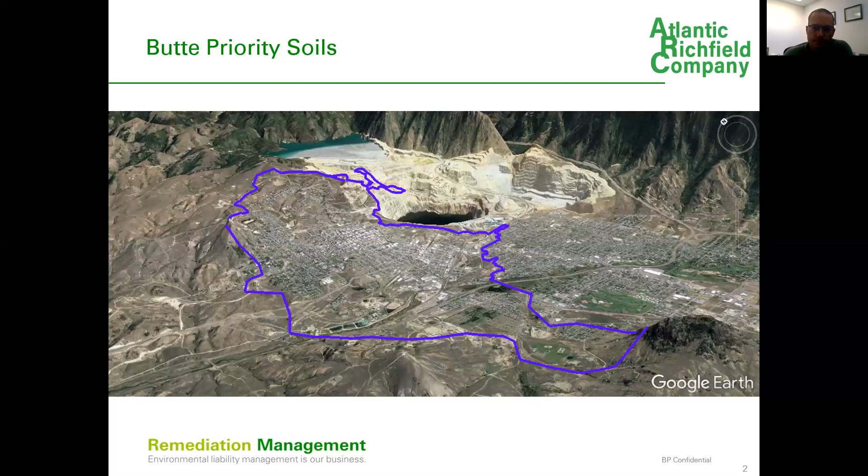In addition to some of that more prominent remediation work, we've also worked with the city to slip line several hundred feet of storm trunks, repair illicit connections. We've installed 4 hydrodynamic devices to treat stormwater at the base of the Butte Hill. We've actually constructed over 10,000 linear feet of curb and gutter in Uptown Butte. And we also completed some street maintenance and storm drain maintenance. And all that work has helped us improve surface water quality in Silver Bow Creek.

On average, we capture about 450 or so gallons per minute with the subdrain, and we pump that water to the Butte treatment lagoons, where on average we treat about 630 million gallons of impacted water each year. There is some surface water influence to that, but the majority is impacted groundwater captured by the subdrain and additional hydraulic controls near Lower Area 1.

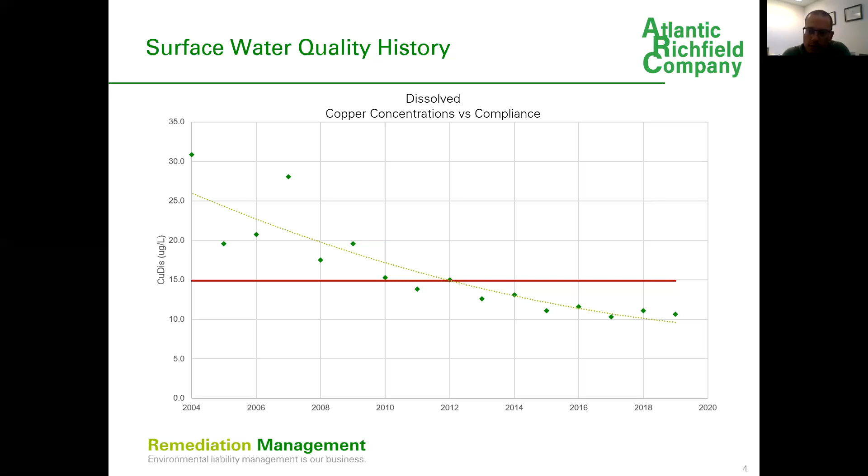When you look at the data a little more granularly, again, this is dissolved copper, you can see that even though our trend line is very good and on average we do meet compliance, even after all the improvements on the Butte Hill we still have some of these exceedances on the far right there. So we realize that we have work to do. Even though we meet standards the vast majority of the time during base flow, we still have exceedances during wet weather flow storm events. So very close, but not quite there.

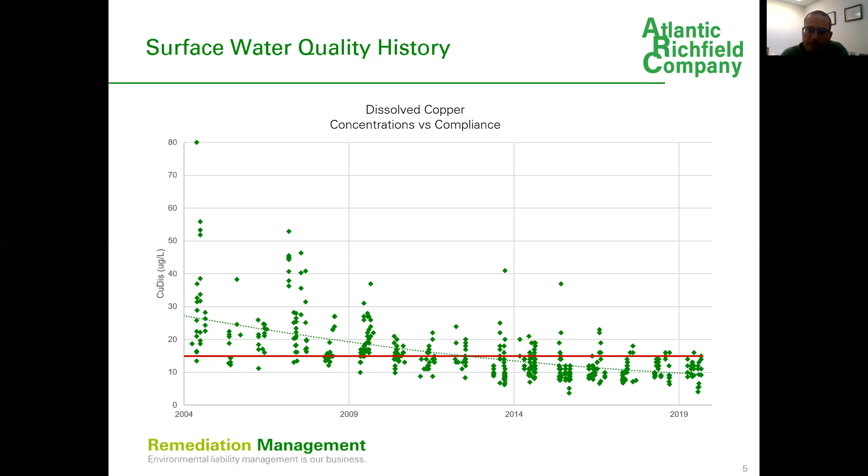So we're going to shift gears a little bit on you, a little context of Butte. Angela, maybe this will be great for you since you've been in town for just around a month now.

So, Butte, we all know its history, but it's described as the San Francisco of the Rocky Mountains, a cosmopolitan city that was once home to an estimated more than 100,000 people. Now, all those people weren't documented citizens, but when you're stacked 10 deep in a single room, you can put a lot of people in a small area. It was a city described as wide open, because it never slept and had a speakeasy or a parlor on every corner, and for another reason, because it had one of the most notorious red light districts in the American West.

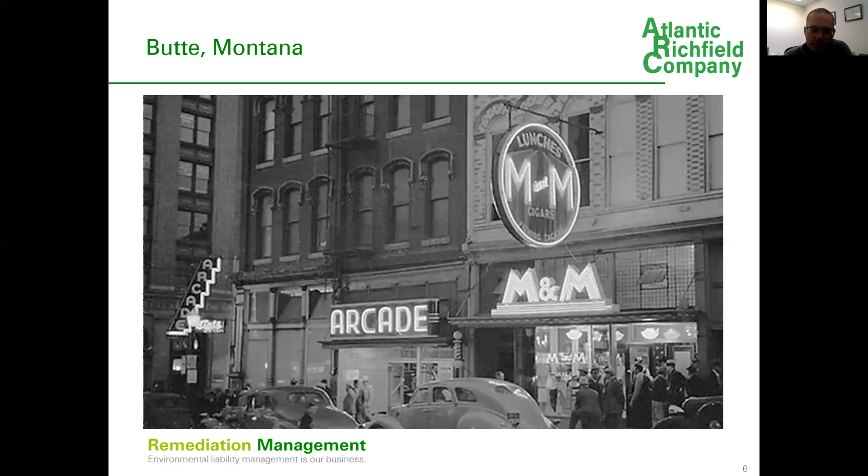And, similar to my last presentation, I feel it necessary to provide a little homage to the M&M, which we unfortunately lost here a few months ago, where you could get your sack lunches and cigars, have breakfast or dinner or a cocktail, just by walking across the place. So hopefully the owners are making good progress on reestablishing the M&M for us.

A big hill and a small stream. Everybody realizes that Butte was built here for the specific purpose of mining on highly mineralized soils, and we still remain sited adjacent to an active mine. We have a national historic district with aging infrastructure and lacking in best management practices. I spoke about the curb and gutter a little earlier, and driving around town, my wife is very well versed in what is curb and gutter and where it is not, what the function is, and where sidewalks are and where they're not. It is one of my primary gripes.

The TSS load, total suspended sediment load, and total recoverable copper and total recoverable zinc concentrations on the Butte Hill each exceed national averages of a typical urban environment by 6-fold. And then when it rains, it pours, right? It's called the Butte Hill for a reason. We've got slopes between 6 and 12%. So those flashy summer storms come across, hit our impervious surfaces, our asphalt, our concrete, and race down the Butte Hill to an extremely small receiving stream in Silver Bow Creek.

The last time I looked at data on the flows of Silver Bow Creek and Blacktail Creek, I believe about 2 CFS of the flow was being provided by Blacktail Creek, and the other 7 CFS by discharge of the Berkeley Pit polishing plant operated and built by Atlantic Richfield on the edge of the mine. So when you have that extremely small receiving stream, the natural water from Blacktail Creek being 2 CFS, compare that to the Missouri River, where Helena or Great Falls discharge to, or the Clark Fork, where Missoula discharges its stormwater, and all of a sudden you can see you've got some issues for assimilative capacity.

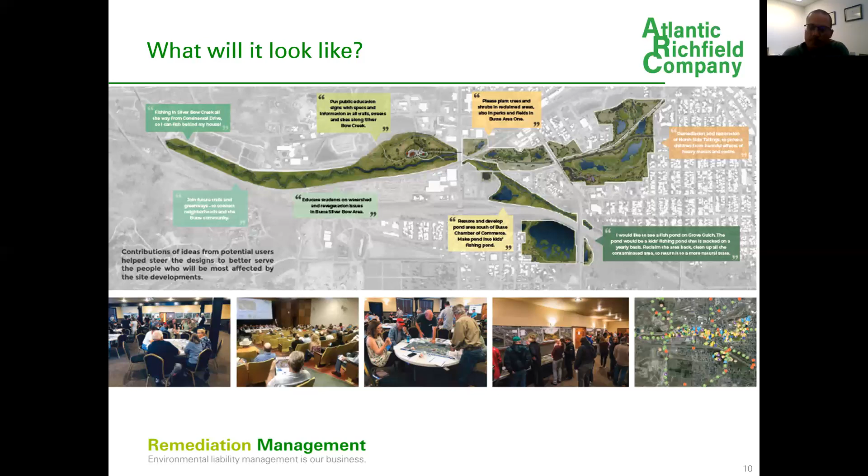So here's an example of what it will look like. This is what we call the Buffalo Gulch project site. You can see the KOA down in the bottom right of the picture, and then the Chamber of Commerce Visitor Center kind of down bottom center of the picture. Looking back and reflecting on this project, I've been working on it a long time. I remember walking with my family when we were still living up on South Montana Street, up above where the Deluxe was, and walking past this and talking about the technologies that we were evaluating at the time as the engineering team.

And in this project site where you now see these naturalized stormwater basins, we had actually considered initially construction of vertical concrete walls with a lined floor. We considered construction of very angular geometry basins with your typical trapezoidal berms with HDPE and PVC liner. And we even explored underground networks or labyrinths of Contech arch culverts, or we looked at Atlantis D HDPE blocks, plastic blocks that really remind you of a crate, and then wrapping those in a geosynthetic and reconstructing the site over the top of it.

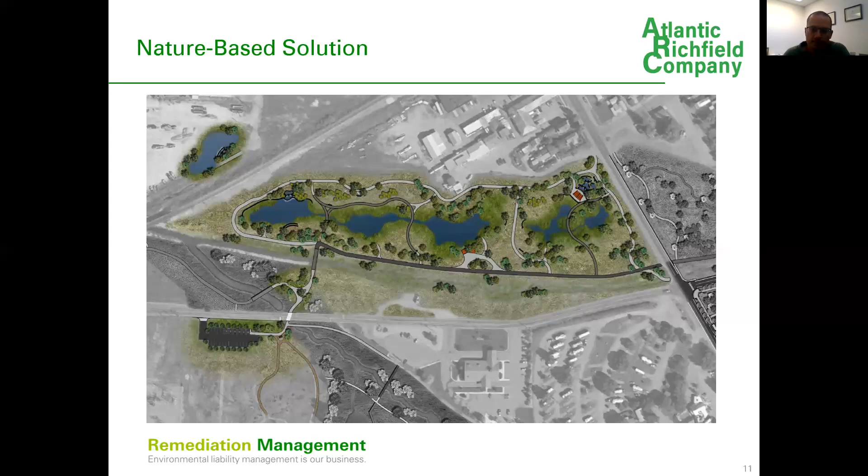And looking at this now, I'm so appreciative of how far we've come from those initial concepts that were really focused on value engineering or a cost benefit framework to one where we are now applying nature-based solutions as our principal design. So it doesn't necessarily mean that the basins will be less effective. By no means whatsoever. We'll still treat the stormwater runoff just as, if not more, effectively than the other technologies, and we'll have the added benefit of the ecosystem services that are provided by a nature-based solution.

And the primary ecosystem service that the basins will provide here is, of course, treatment of that contaminated stormwater. The basins will do that primarily through Stokes Law, the settling of suspended sediments in the forebays, which would be off to the right of this picture. And then the flow would continue to pass through these series of permanent pools and continue to polish. Additional benefit by phytoremediation at the basin edges, and within the channels connecting the basins, due to the presence of the vegetation. And we'll also see positive impact for the dissolved fraction through biological uptake, adsorption, and precipitation.

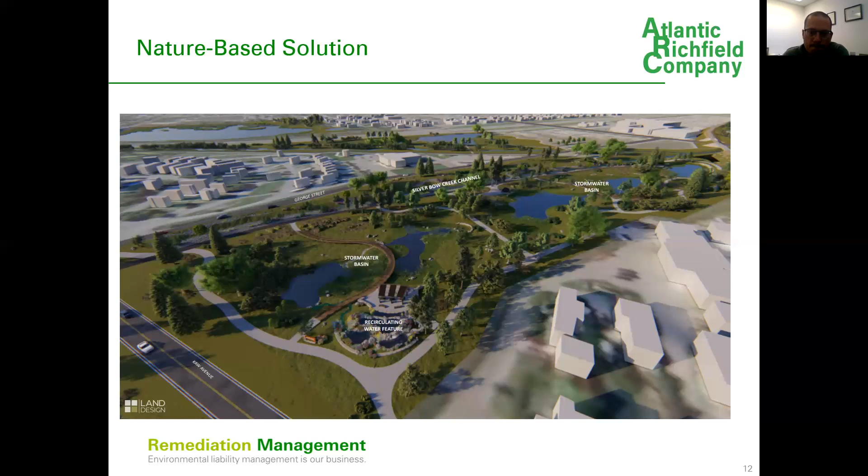So a little more engineering here. The basins are being designed not only to meet the minimum requirements of the consent decree for volume, but also to function as best as possible during most storm events. And what we're focused on there, the hydrology team, the engineering team, is that 90th percentile storm. So the storm that we see 90% of the time in Butte, Montana, is what we're really focused on. That hydrograph, how much water is flowing, the peak flow, the intensity, and the duration. And by doing that, we will have better treatment most of the time versus focusing on a singular, maximum design event.

So that 90th percentile storm will race through these basins and inundate the 90th percentile zone, allowing the water to settle and disperse and settle out the solids, and providing the necessary contact for biological treatment. Portions of the flow will travel through what we've conceived as a sand gravel substrate layer, and that'll allow for additional root contact, but it'll also serve as an irrigation reservoir for those plants, so we can maintain that nice riparian edge across the sites instead of seeing it dry out in the summer months.

We anticipate our target drainage rate from the detention basins is about 120 hours. And we'll do that with a downward opening penstock gate or weir, and that'll allow us to drain the cleanest water off the top. Initial analysis, I can't remember the duration of the period of settlement, let's just say after 12 hours, we're seeing about 3% of that remaining load is in that upper column of water, while the majority of the rest of the load has already been treated in the forebay, and it's much more contaminated at the bottom of the pools.

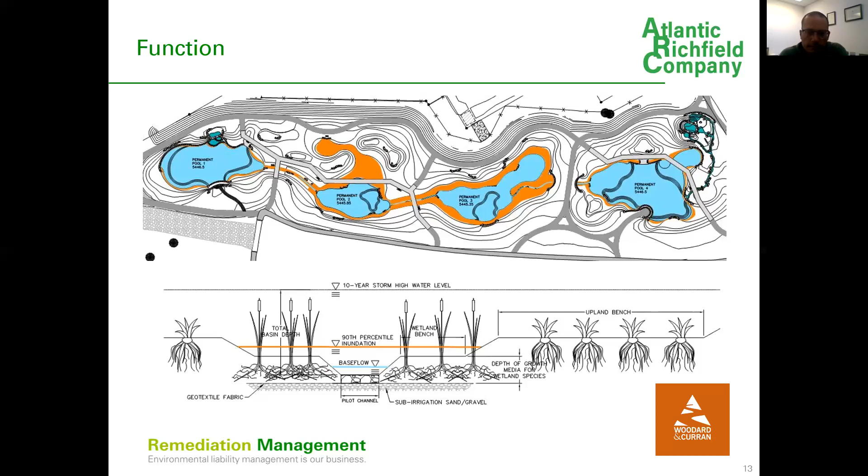Here's another mention of the ecosystem services, and that's mitigating flood impacts. The 4 primary drainages that contribute to the system drain more than 5,000 acres of land within and around BPSOU, so a significant portion of BPSOU plus areas out by Beef Trail, southwest of town here. And the basins at Buffalo Gulch and Diggings East have been sized for the 10-year 24-hour Type 1 SCS storm. And that results in 50 acre feet of stormwater storage capacity to really knock down those hydrographs, those peak flows from the storm events, and protect downstream infrastructure. So here you can see that we anticipate to be able to knock that flow down by about 120 CFS and start to remove those solids, metals, and other contaminants from those storm flows.

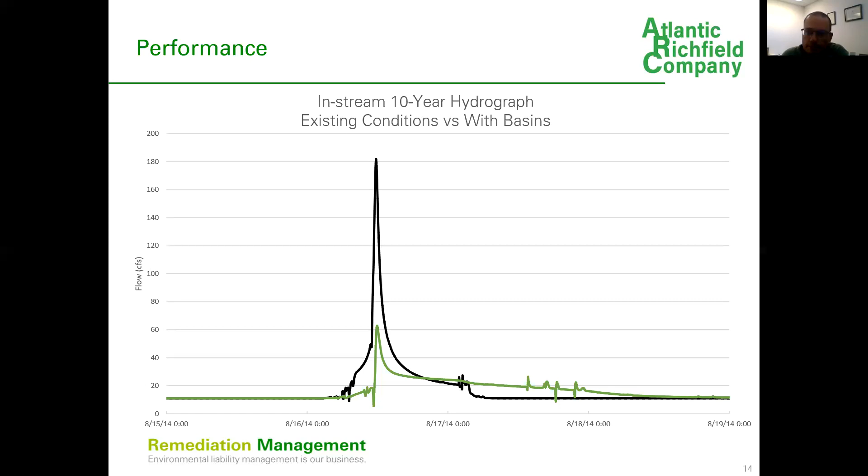So moving back to the forebays a little bit and the function of the basins, the forebays, we anticipate they'll remove about 80% of the suspended sediments, while the primary detention basins beyond the forebays will polish up to another 80% of the remaining suspended sediments. We've modeled the system assuming allocation of volume between 10 and 50% for the retention basins. We found a sweet spot around 30 to 35%. So what we've done now is size these permanent pools for 30% so that we can balance our absolute need to address water quality, but not just have these giant retention basins in the middle of town that don't provide any benefit to biodiversity or the aesthetics of the setting.

These permanent retention pools will be a water source in the substrate for the natural irrigation of the wetland species, but we'll also use them to recirculate water flow through the system, and that'll provide a nice natural aesthetic, both audible and visual, for the users of the park space. It'll also help reduce anoxic conditions, which can result in off-gassing of arsenic as plants decay.

Overall, we expect to see an 81 to 84% reduction of total recoverable copper and a 16 to 30% reduction of dissolved copper across the basins, inflow versus outflow. That correlates to a 36% total recoverable copper reduction in Silver Bow Creek, and about a 10% dissolved copper reduction in Silver Bow Creek over our current values. And our exceedance rate, we anticipate, will go down by about 50%, which puts us in near compliance, in alignment with what we see in the consent decree. And we're hoping for a little bit more positive outcome than what we're predicting now.

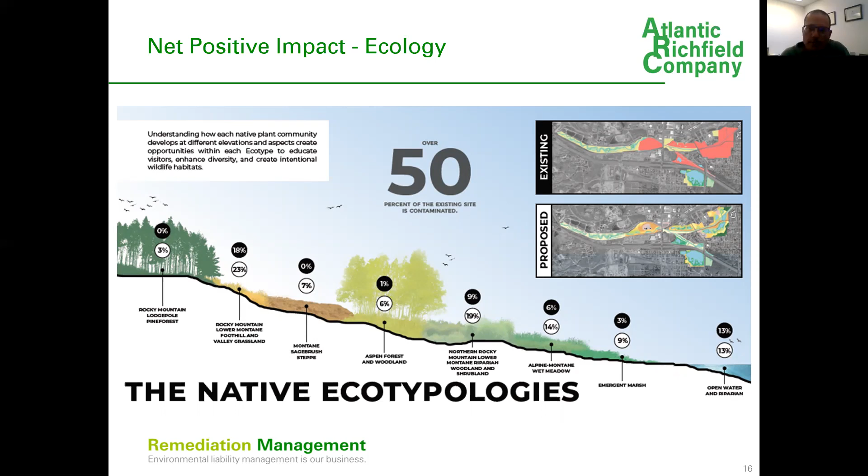We'll also consider the habitat needs of our local wildlife. In this project, we'll plant around 1,100 trees ranging in height and caliper, and around 1,450 shrubs. The woody species, in addition to the riparian areas around the basins and the streams and the native grasses in the upland areas, will create necessary structure for nesting, security, and foraging.

Carbon, net positive impact for carbon. We've learned that by simply varying the size of the planted trees, we can increase carbon sequestration by approximately 35% and stormwater capture by 84% by the time those same trees have reached 20 years of age. By the time the trees have reached 50 years of age, they'll have captured more than 53 million gallons of water and sequestered nearly 2 million pounds of carbon.

We have been doing a logistics analysis of where we'll transport those 800,000 loose cubic yards of waste. By considering different alternatives, different locations for the repository, we've determined that we can reduce emissions of the haul trucks by about 2,800 tons of carbon dioxide equivalent and save nearly 590,000 miles traveled.

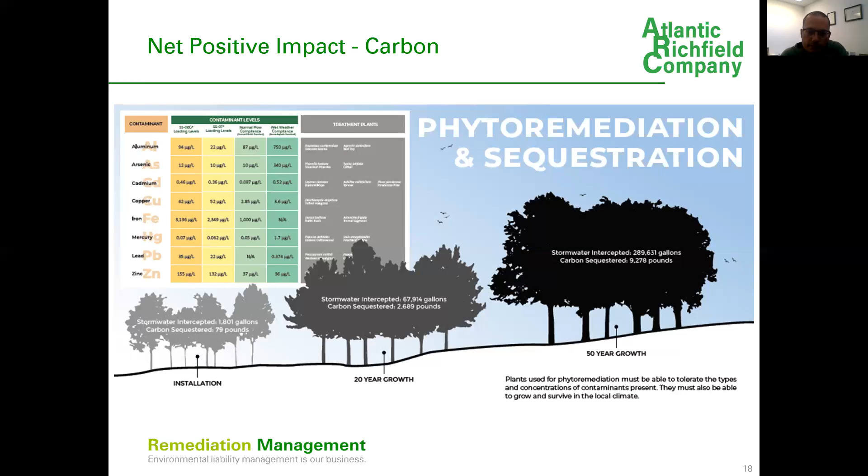Water conservation and biodiversity. I take it for granted at home. I usually just set my timer and let it go off probably more frequently than Butte-Silver Bow would allow. But the irrigation systems that we install here for some of the turfed areas will be activated based on soil moisture content instead of just on a fixed timer.

The team conducted a preliminary bloom analysis for the project so that our planting plan can select species in a manner that sequences the blooms to ensure maximum food availability to critical pollinators throughout the spring, summer, and fall seasons. We've agreed to construct a fishing pond at Northside Tailings. In that fishing pond, we intend to work with Butte-Silver Bow and Montana Fish, Wildlife and Parks to stock it with native cutthroat trout.

Sustainable practices. Early on, we were able to secure over 200,000 cubic yards of burden material from the Montana Department of Transportation bridge project just west of town. We'll utilize that material to reconstruct the sites and as structural fill material beneath the vertical features. By applying the Leapfrog model, we hope to identify up to 90,000 cubic yards of additional material at Diggings East that will be determined clean and suitable for site reconstruction.

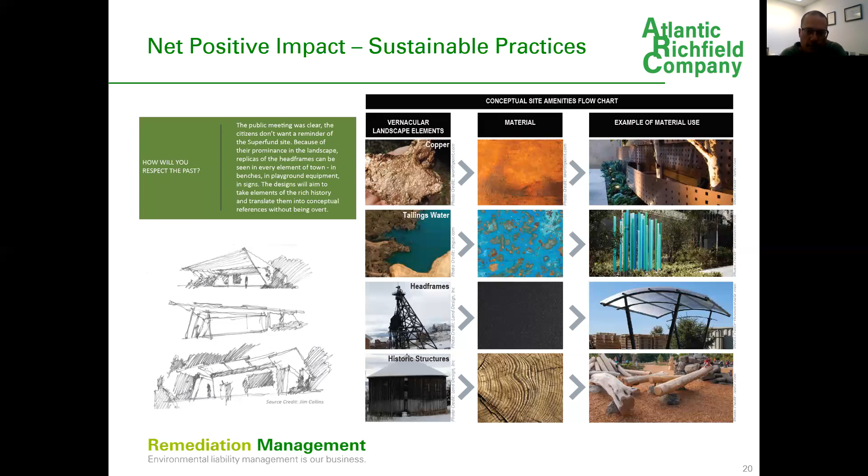The work that we complete here, it'll address the environmental contamination. It'll further protect surface water and human health, and it'll be a benefit to both the social and economic well-being of Butte. I looked at some studies, this one based on park economics, the 2015 study by the National Recreation and Park Association, stated that the Montana parks generated around 1,600 jobs annually, resulting in $56.5 million paid to those employed, and then an overall economic stimulus to the state of about $165.5 million.

So you add another park to Butte's already pretty impressive park system, and we just increase our opportunity to provide jobs and stimulate economic activity in our town. It'll create a destination in Butte, right? We'll have a 160-acre green corridor in place of what are underdeveloped and impacted sites now, and that will result in potential community branding opportunities and really just cleaning up our front step as you're driving to Butte off of Montana Street.

It'll allow us to retain and attract employees and residents. Quality of life is one of the primary factors of businesses when selecting where to locate or relocate, so they can provide a good environment for their employees, and prospective employees, when they look at somewhere to relocate, looking at a new job, it's certainly one of the things they look at. Do they want to live in a city that is impacted, or do they want to live in one that is vibrant and growing?